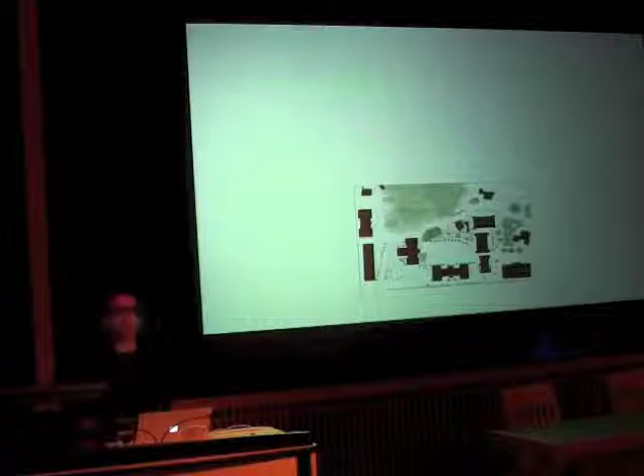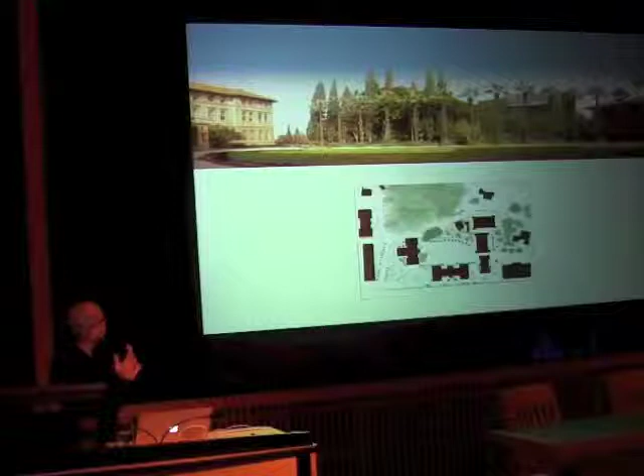So we knew from the beginning of this project that given the site of our project in a kind of embedded bosque of trees, our building was not going to speak to the urbanism and the architecture of the campus, but rather dissolve itself into the branches of this nature. Our task then was to develop a system that could generate an organizational structure, a spatial structure, and a way to blend the relationship between the inside and the outside of the building.

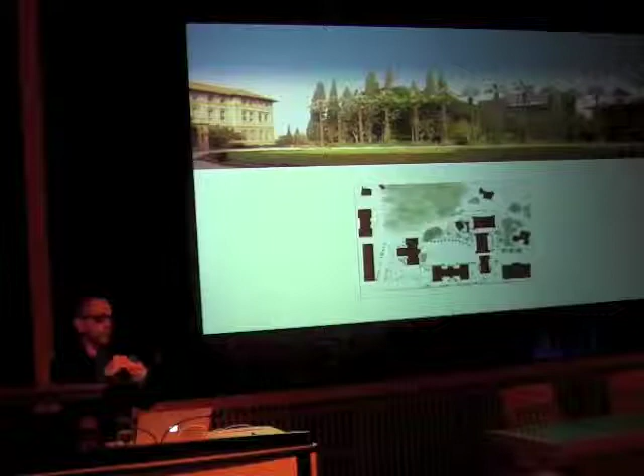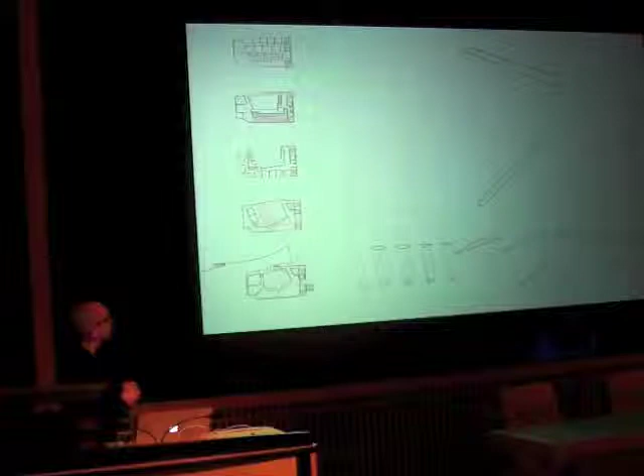To do that, we started with a DNA. A geometry of a hexagon, once truncated, can become triangulated to make a column. Once expanded, it can produce the conditions for a pilotis. Once rotated, it can transfer loads from one condition to the other, or be flattened simply into a wall system.

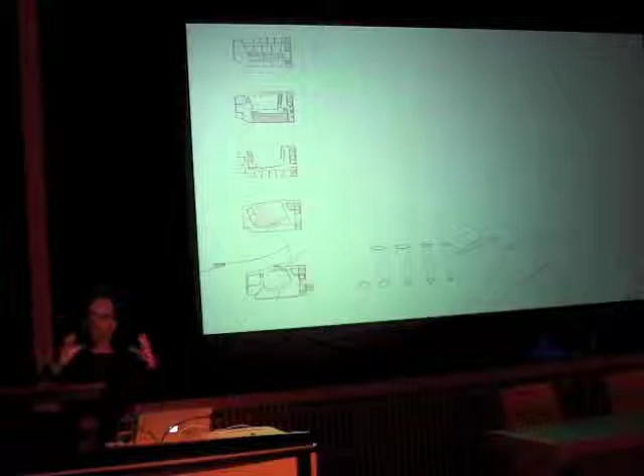The notion that a geometric seed, which is different than a concrete block per se, becomes in a way a constellation of forces that can essentially be compacted and thick at the bottom, spatializing itself, transfer loads in the middle, and effectively lighten up at the top and develop a system of branches that holds up some of the lighter aspects of the building.

Following the modern paradigm, one can begin essentially with a simple tray-based structure for large volumes like auditoria, create transfer beams for cantilevers, essentially the same thing in relationship to the bosque of trees. And then the configuration of the structure begins to stretch and split in a binary way as it goes to the top. The building essentially becomes an index for the transformation of the structural system.

Here, effectively a courtyard at the top of the building, describing the spatial mesh in which the building is embedded. And of course, on the outside of the building, the idea that structure and skin envelope becomes part of its iconographic agenda. That structure here has now become part and parcel of the redefinition of the type.

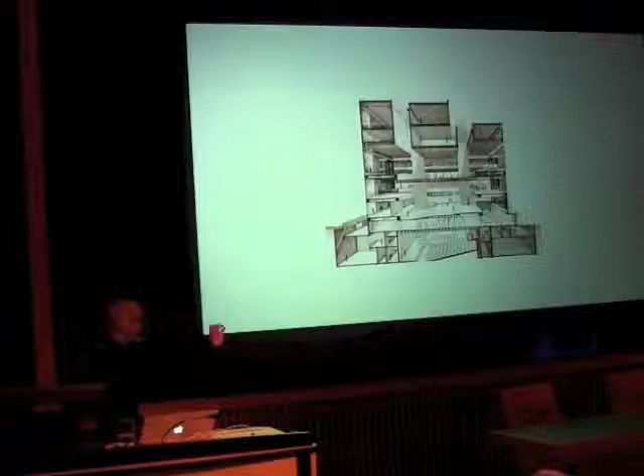And that building somehow manifests in different tiers: the auditorium, the exhibit space, the library, the crit space, and the studios, bringing the light from above, where all of this is brought together. And the quest somehow for integration and synthesis is consistently at work within the body of our work.

At Georgia Tech, we inherited a building, the Hinman building, and it is an extraordinary piece of architecture. Designed by Heffernan over half a century ago, the building has certain salient qualities that make this maybe not just a project of restoration and preservation, because we couldn't fit all of the program within it, but it makes it a dance with the existing building.

I will show you that in a second. But first, urbanistically, the recognition also that the School of Architecture at Georgia Tech is 3 or 4 different buildings, and various functions are distributed between them.

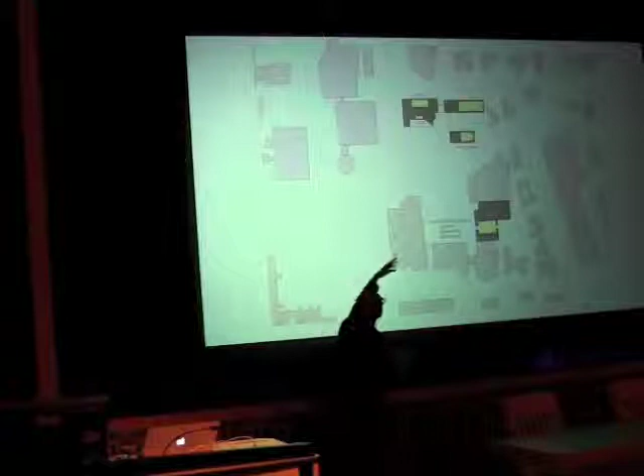This is simply the new wing that is going to help to connect the main quad to a working quad in the back, using the high bay of the existing building as a massive factory, a studio space, that brings all of the elements of this campus together, making the quad and this interior part of a public continuum.

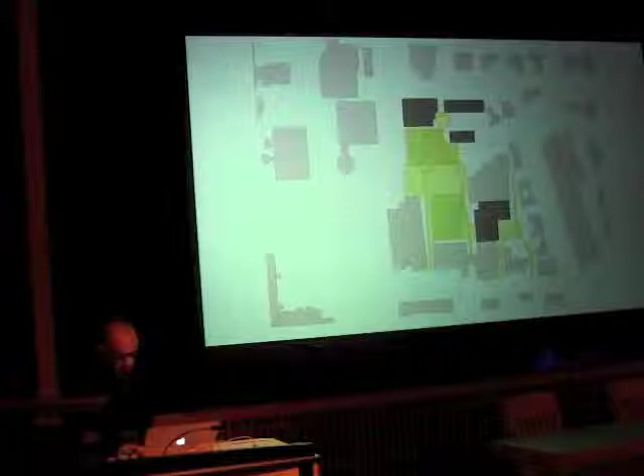Now, as I was saying earlier on, the studio, as you well know, is at the heart and the soul of the School of Architecture. It is composed of elements that need to work with it. The idea of the basic support that one needs, printers and a shop. The notion that the studio space is not merely a place of production, but is a place of research, where libraries and laboratories may get integrated into it, in the studio of the future, where culture becomes part of it.

What happens when you don't segregate lecture halls from the studio space? What happens when you lecture in the studio space itself? And the space that starts after hours, where cafes, movies, and other things happen when the faculty are gone. This is the conception that we had in treating the high bay at Georgia Tech.

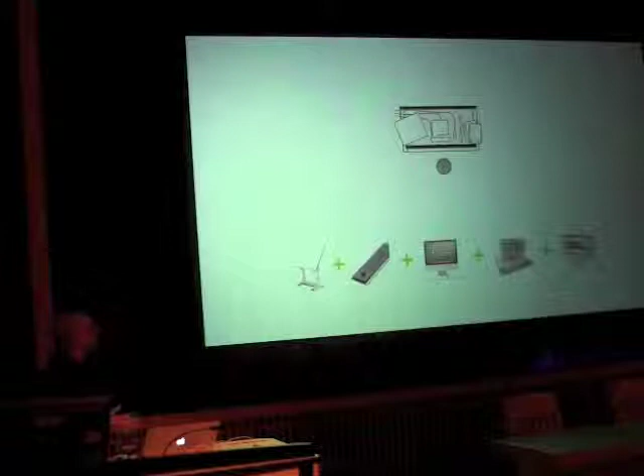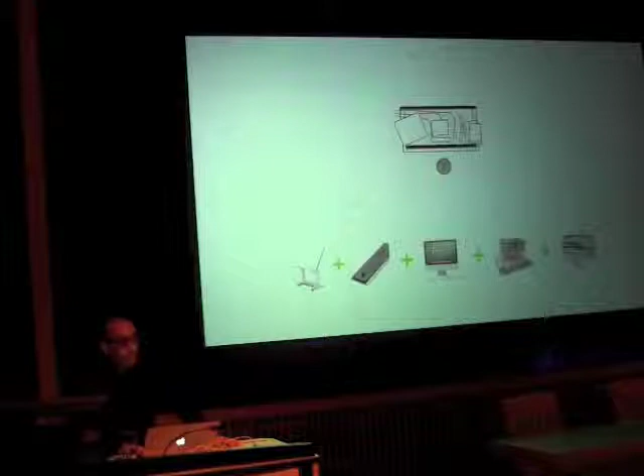It was with the acknowledgement that the parallel rule no longer exists, and the way that we work and the way that we store is just different. So we needed a new way of conceptualizing flexibility while accommodating for the differences of pedagogy in one space.

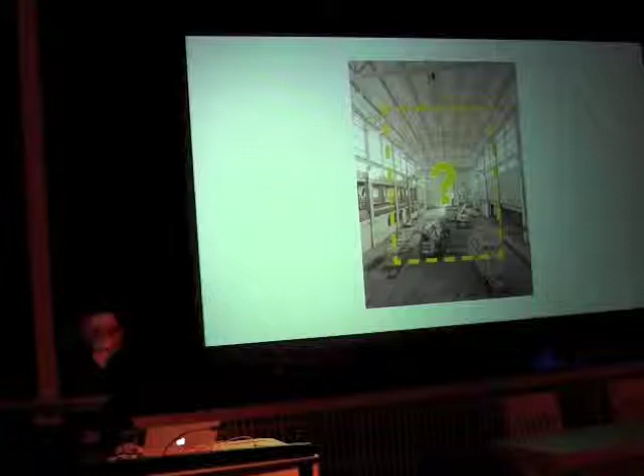The big question, what are we going to do in this incredible space that was given to us? A huge factory space where amazing research on helicopters and many other technologies were developed through the 20th century. And you know, it reminded us of the Tate, where extraordinarily different exhibitions were able to manipulate that space as a public space, as a piece of urbanism, as a space of phenomena, and that our space too could become such a significant anchor for the campus.

But being also submitted to a formidable amount of programming, we realized that we actually have to occupy it. So after a massive struggle with the university, we realized that we had this high bay, and now we have to just stuff it like a piece of taxidermy. Luckily, the economic gloom and doom happened at that moment, and the budget was cut. And so the value engineering process helped us to reduce the program, yet not kill the building.

And so in fact, within this process, we realized that the high bay can remain intact, but now we have to think of it strategically in terms of what it can do for us. We realized right then and there that what was important about the ground was its flexibility. Yes, we could lift the ground up to wire it and put all of the technologies on it, but there was a great asset in the truss and the crane that was on the roof, because that's where everything could hang from.

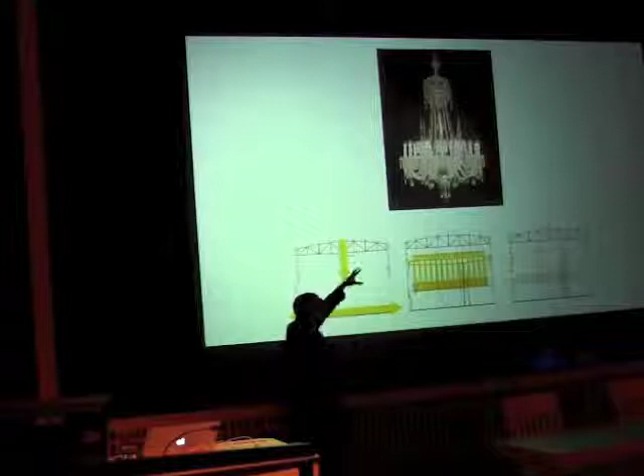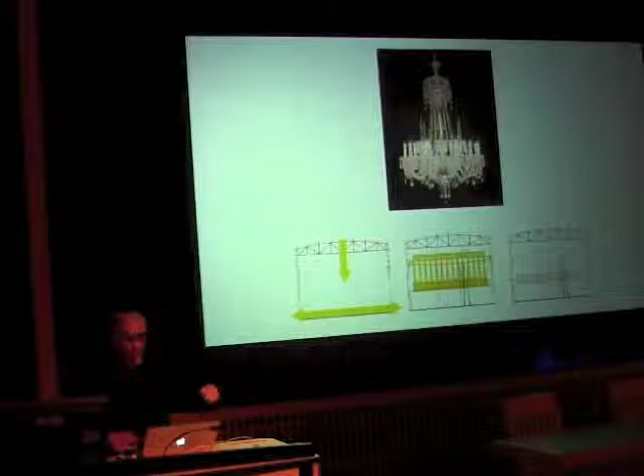And so the project was really born out of this tension of flexibility defined on the vertical axis versus the curricular flexibility connecting the studio spaces with exhibit spaces, fab labs, PhD spaces, and so forth, connecting it socially on the horizontal. And really, the building was in a way born out of the repurposing of that existing crane, locking it into space and literally suspending the new visiting critic studio on top of it, where this tray is suspended in midair.

The ground is flexible. It has desks, but they can be moved, they're on wheels, and they constantly get reshifted in many configurations. The roof is the piece of infrastructure that informs the space. The crib, what we call it, is really the suspended element with one stair that kind of comes down only at one point, lands on a desk actually, it doesn't even touch the ground.

And then on the southern wing, a new spiral stair that connects and activates the southern edge of the building, creating a kind of continuous circulation loop. And finally, the lighting that hangs low during the workspace hours, but when you're making large installations of 30, 40 feet tall, is brought up to make the high bay an actually functional space once again.

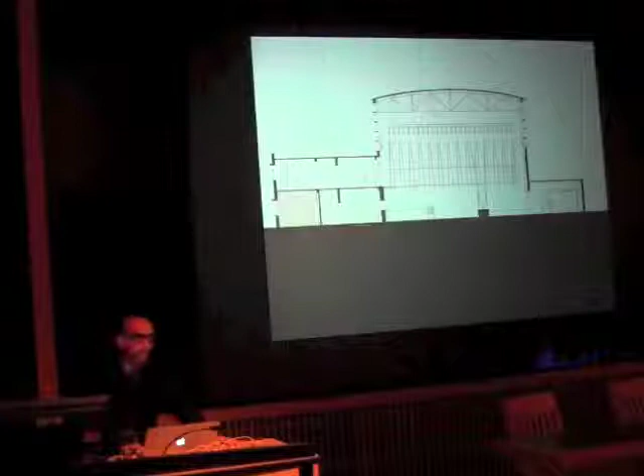And then here, the lateral flexibility that is given in connecting the factory to the fab labs, the exhibit rooms, the PhD research spaces, and the other studio spaces makes this a kind of interdisciplinary space where everything comes together. I apologize, I don't have the images of how this is being used, but in fact, the Beaux-Arts Ball has occurred there, the exhibitions have happened there, crits happen there, cinema happens there, graduation happens there.

So I suspect that your own high bay has had many events like that. But keeping true to the idea of suspension, everything is also suspended within that space. The guillotine wall that you see in the distance there is a 60-foot wall that separates the gallery from the main space and just drops down. The spiral stair is an off-the-shelf element that is shrink-wrapped with a kind of extend mesh fabric, as a kind of tensile structure that is suspended from one of the chords of the truss.

The grid, as you see there, unfolds the steel flanges of the structure to produce a stair that lands on a collective table. And of course, the assembly of all of these pieces in relationship to custom fluorescent lighting that we drop in place that get plucked up when needed. And it's amazing actually as a building because it's truly rough. It's a rough piece of industrial architecture, though it was really pleasurable to see huge thugs weaving this thing very delicately and crafting it like really a beautiful piece of architectural work.

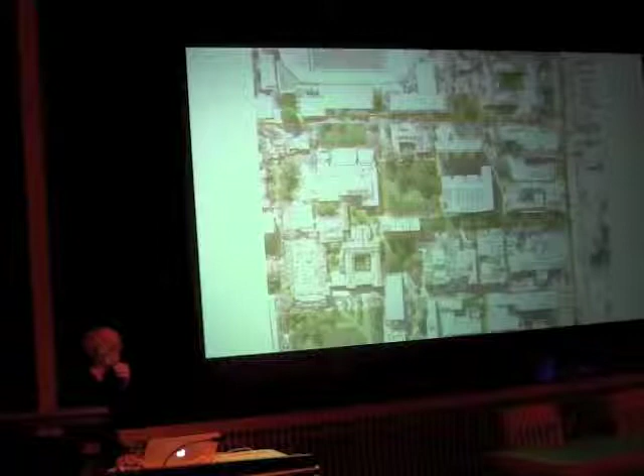There are many issues about this project, but suffice it to say that this is a building right in the center of what is called the concrete lawn right above me here, that is in the round. There is no front and there is no back. But part of the critical agenda of this building was to make it urbanistically integrated into the rest of the campus, drawing in the disciplines from all over the campus into it, and actually exposing the functions of architecture, educating people about architecture, but also giving up our programs to their use.

One of the agendas was to bring Masson Road on the south from Swanston, the main artery into the campus, and connect it back into the building. To produce a new court on the west to what they call the Lizzie Murdoch building. This is the famous Murdoch, the mother of the famous Murdoch, and puncture it through the building, producing a new promenade through the building. A connection between the main central space of the building back into the northwest edge, a cafe and an alleyway that connects it back to Swanston.

The service area to the northwest, a kind of Fab Lab court to the north, and of course the concrete lawn, the main public space that connects the building to the student center opposing it on the other side, at the core, at the heart of the campus. The School of Architecture and Planning and Landscape and Building Construction is what defines the heart of Melbourne Uni.

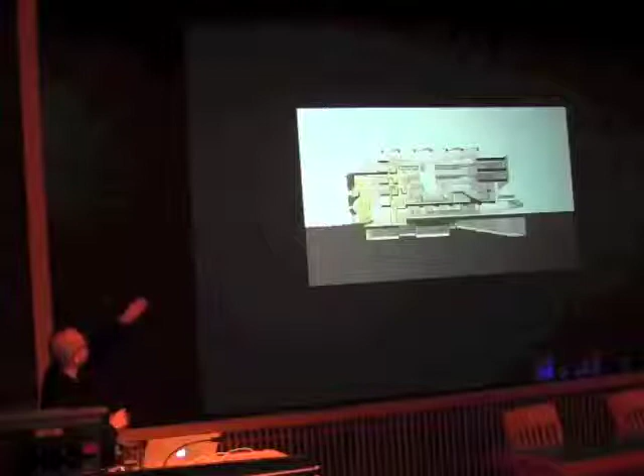A place in section with a piano nobile, a new ground plane that is above the ground, engages an existing building, the Joseph Reed facade, the new circulation, a vitrine against the Lizzie Murdoch building, and then finally a ceiling, a kind of coffering of light from which, very much like Georgia Tech, is suspended the visiting critic studio, a kind of iconic element that brings together some of the key elements of this project.

The building of this new ground was essential to it, because essentially what we wanted to create was a street that runs through the building, accessible 24/7, and exposing the unique functions of a school of architecture to the rest of the campus. The spaces of research on the left, the library, the exhibition hall, the Fab Labs, the cafe, all of those things that basically bring architectural culture to the fore.

And then this piano nobile that produces this new ground. This new ground is that internal plaza, the ground for this atrium, above which the visiting critic studio is suspended. The ground essentially informs a kind of unit, a unit that grows up to become the locker systems, where all of those students who don't have a dedicated desk have places to store their material.

This locker system becomes the envelope, a spatial system for a classroom underneath, an experimental classroom, but also a bleacher system, an outdoor classroom open to the atrium, which anchors one corner of this space. The circulatory system that envelops this, in fact, is not a corridor. It's a widened system which is then occupied with permanent pieces of furniture that begin to define programmatic possibilities that would otherwise be succumbing to simply circulation space.

This ceiling is a structural ceiling. It is all made out of laminated glue-bound beams, bringing in southern light. Southern light for them is northern light for us, from which is suspended the visiting critic's studio. The idea of this was to transform the monolithic, thick, and structural system of this coffered ceiling into a form of suspension.

That form of suspension essentially takes the thick wood and begins to create a veneer system out of it as it goes down. What is deep and monolithic yields to a thin veneer system as it hangs down to the bottom. Essentially a glulam system that transforms itself into a thin plywood system, the perimeter of which extends the kind of millwork logic of the space.

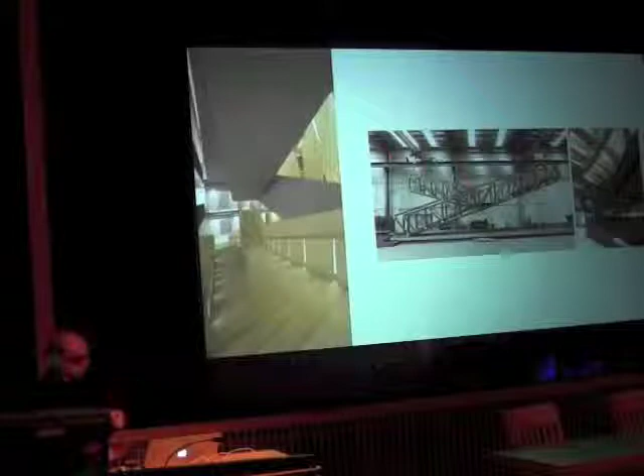The connection of the coffering at the top defines the depth and the thickness of that entire system as it comes together and begins to produce a form of entasis, a buckling of that roof literally at the center as it hangs down. Flanking this is what we call the Y-stair, a kind of continuous loop of circulation that constantly splits into two so it activates both wings of the atrium. Here you see the construction of that Y-stair literally hot off the press just last night.

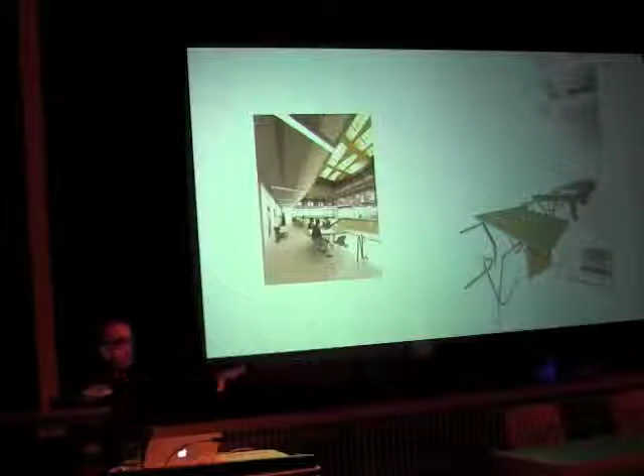And then a stacked series of terraces which then acquire a variable depth to them, where different programs are amassed to produce the life and essentially the body of what I call the studio space of this building. This is all the borrowed space along these flanges of this perimeter. The ground, of course, is the public plaza. The second deck is conference tables, collaboration spaces that look out over onto that plaza.

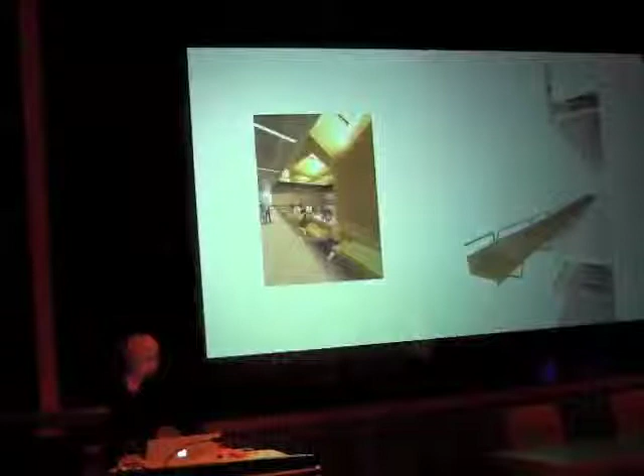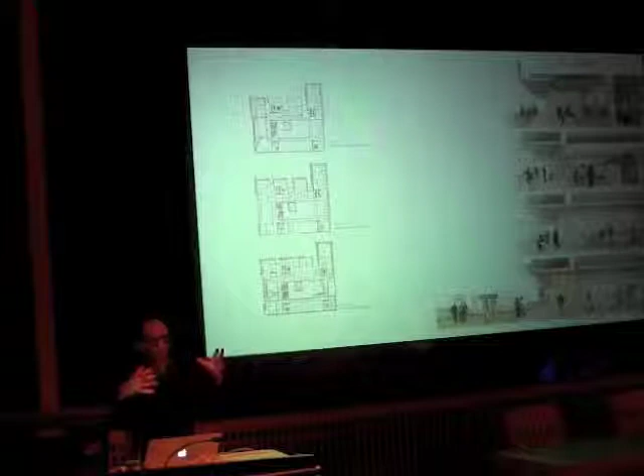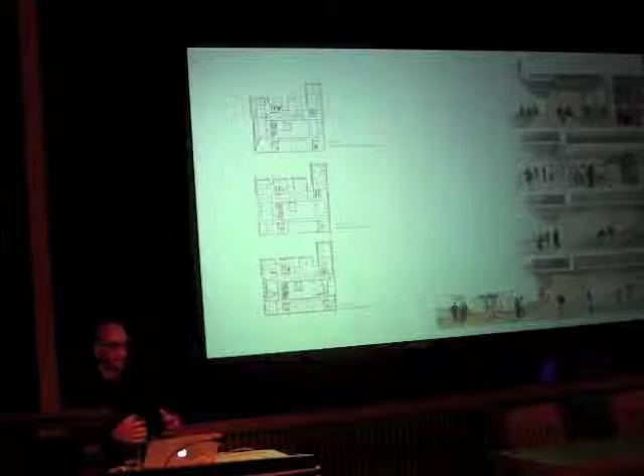The next space, counter spaces that extend the spaces of the studio and classrooms with seats that look back onto it. And then on the top, next to the PhD spaces, benches that look back onto crit spaces that extend the logic of these spaces into the depth of the building. And thus, each of these spaces produce a kind of a zone of pedagogy that keeps recalibrating the depth of this building, taking what would be a classic donut organization and testing its frayed edges to become appropriatable by the student body. In a way, transforming spaces of scheduled dedication into spaces of appropriation.

Now, having just seen the completion of the Media Lab at MIT, a beautiful and arguably sophisticated building, but unfortunately a perfect jewel, we were also very conscious of the necessary roughness of what an architecture school needs to be. We see the School of Architecture as a piece of infrastructure that the students transform. It should precisely not be too finished.

So we wanted to produce a structural shell of concrete, and the precast industry of Australia is fantastic. But also working with a ply system of wood, produce formwork that becomes embedded in the existing building and stays there as part of the natural resource of the building. So in fact, this is a wood building that is built up 5 stories with the formwork that becomes permanently embedded in the building.

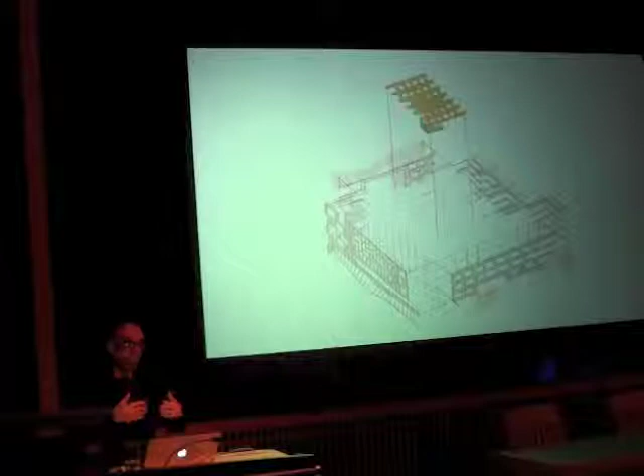And then the skin of the building becomes a variable louvered system that engages with the northern, eastern, and western light in different calibrated ways as it navigates itself around the building, with the southern exposure exposing the raw concrete of that structure.

Ironically, we had to inherit not a building, but a facade, the Joseph Reed facade, from 50 years ago on the site. This building was never on the site. It was a bank in downtown Melbourne and was transported here because of some kind of donation to preserve it, and never had a building behind it that corresponded to its syntax, its organization.

This also became an opportunity for the first time in history to frame the importance of this structure. It is actually a very beautiful piece of classicism, but also establish porosities between the inside and the outside and a meaningful engagement with that facade. So in fact, one of the things that we were able to do is to develop a line of thinking for it. One, a way of framing it, documenting it, understanding its depth.

Two, developing a structural system that would buttress it to keep it in place. Cladding it from the inside, registering its apertures, its openings, its windows. But then for the first time, engaging it, penetrating those windows, and targeting views out into the plaza, but also extending two of those windows as a kind of studio crit space that engages back into the circulation system and erecting it from that facade.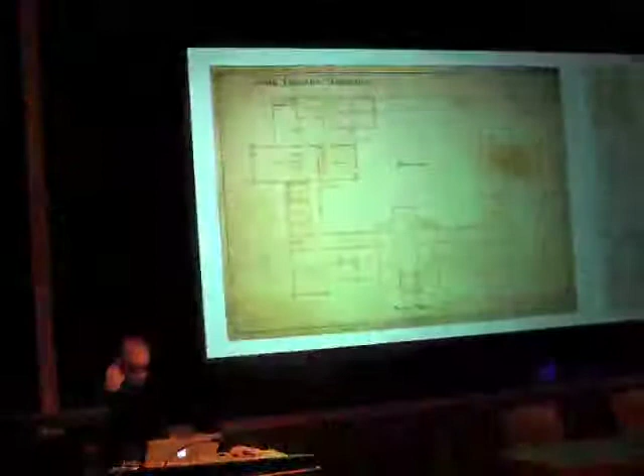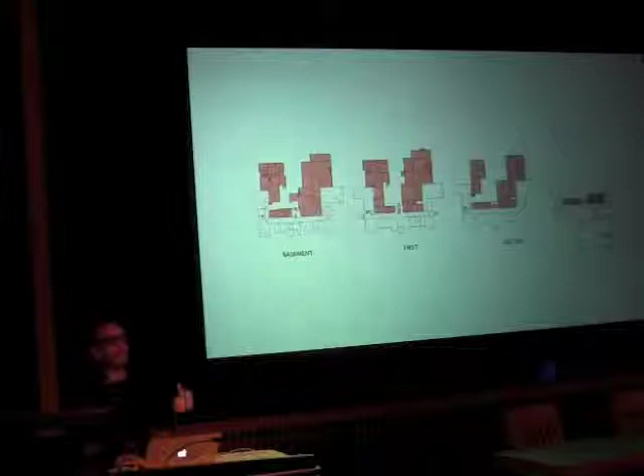And therefore this project, all of a sudden, for the Daniels School of Architecture, Planning and Landscape, becomes this incredible opportunity to reflect on the design disciplines as an organic and larger conception. It's not just a building of architecture, but really a building of landscape. The existing building has an interesting existing morphology, a kind of U-shaped building, but over a long period has a series of aggregations of additions that have been added onto the northern side. This is a monumental building that on Spadina has this incredible presence on the south facade, but a kind of village-like series of structures on the north.

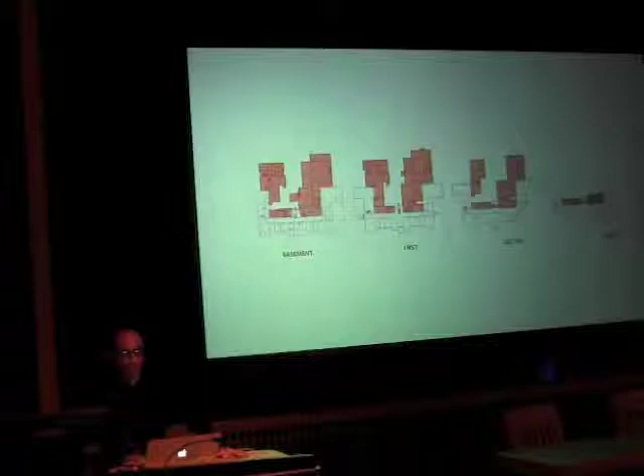So part of our strategy was really to readapt, if you like, misadapt the building, using the existing circulatory system that ends in two pavilions, invading it, if you like, but completing what will be a new court for it. Completing the building then enables it to get a new facade on the north, for the first time gaining a kind of presence towards Spadina North, anchoring the building with cores on the two upper sides.

In doing so, producing a new flexible hall that is at the core of the building, another courtyard, a space that's divisible by three for three classrooms, a multiplex auditorium, a kind of space where everything happens, and bringing this all together in a way that negotiates its relationship between the square at the center of this circle and the geometry of the roundabout as a huge urban phenomenon.

Now, what's important is that Toronto is a series of north-south axes with a few unique urban spaces, circular in nature, and this is one of those spectacular spaces. It's a space not just of the campus, but of the city. The existing building looms large and is visible all the way from the lake, but in fact has never had a northern presence. So our strategy in great part has to do with creating a base, a socle for that, producing a series of landscapes around it that can give additions in the future, and making the landscape a kind of buffer for the new building, and then using that to illuminate those spaces within that landscape and create a new condition for the urban perimeter of this project as a whole. In essence, completing the circle, urbanizing the circle, and giving it new life.

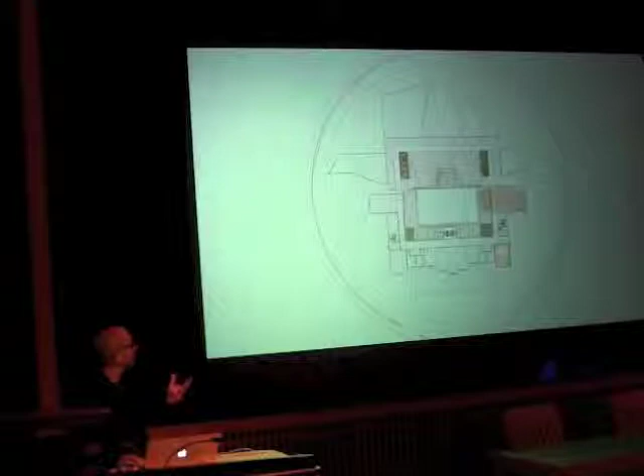Of course, the building comes with certain constraints. A water easement that does not permit us to occupy the east side, but it becomes a way of developing a logic for its flexibility and its expansion, with the possibility of an expansion into a gallery in the first phase, the expansion of a smaller lab, a kind of urban institute, a research institute, all of which work off of the logic of the existing corner anchors that are part of a kind of latent logic of the building.

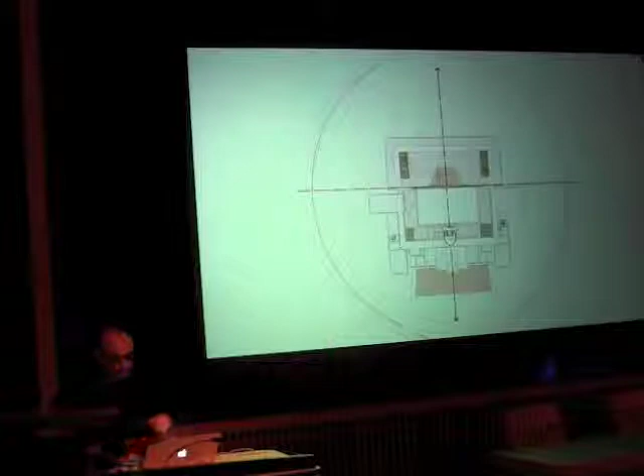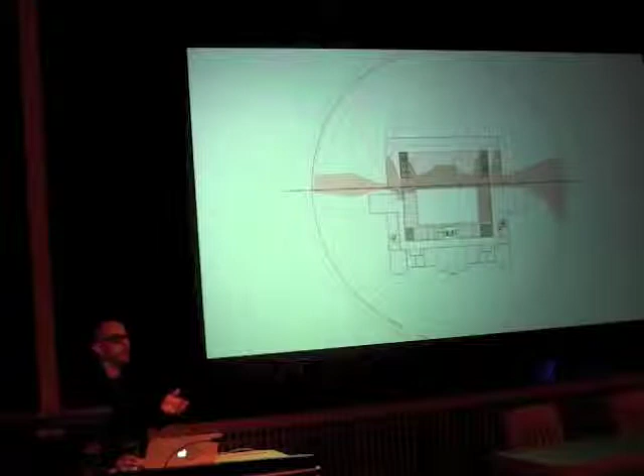All of this recognizing that the strength of this project is known on the north and south axis, an important moment of acknowledgement in the building, and something that really is reinforced by the stature and the presence of the building, but without ever a program to that south. So with the addition of a new terrace, in the cold climate of Toronto, the idea of a new public space that leaks out of the building towards Spadina south, this was also a moment to recognize that the practical functioning of the building doesn't happen on the north-south axis, but the east-west. The campus is on one side, the community is on the other side, and the street that runs through this building is really what gives life to it.

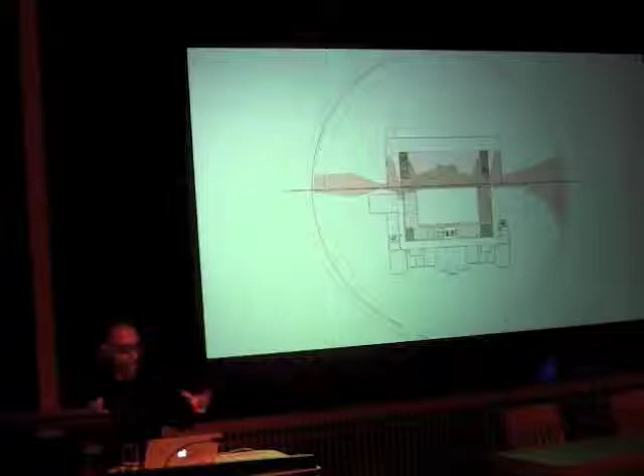And all of the key programs of the shop, the auditorium, the cafe, and all of this business happens right off of the street. Again, 24/7 it remains open. So with the new facade on the north, as one navigates around this new crystalline landscape on the perimeter of the building, we are drawn into the west face of this building with this new silhouette that it gains.

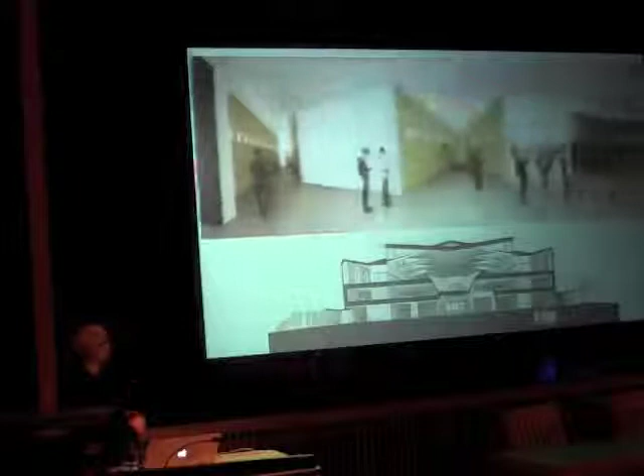On the eastern side, we in fact open up a new public space, a bleachered seating facing south, the characteristic oak tree, which is part of the symbol of U of T Toronto, and the gallery space that literally opens up onto the eastern face. The street then is lined with lockers and with a series of forced perspectives, the most prominent of which is the view up Spadina North, bringing natural light into the core of this building. This large vitrine on the left then brings in light even into the auditorium.

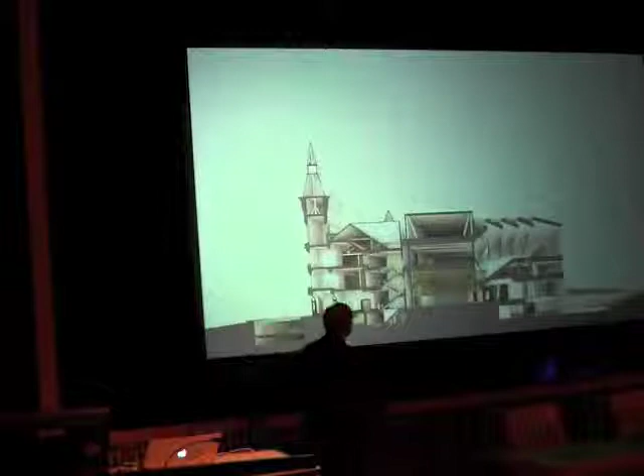What is at the core of this building has an optical advantage to the spaces beyond, but also in section produces the possibility of drawing in light not only through the Fab Lab into the auditorium, but also from the skylights above here, and a series of straddle spaces that create out of that core a kind of luminous box on the interior. In fact, what would be in another project the black box, the pit of this project, has all of the main programs straddled around it in this saddlebag fashion.

The undergraduate lounge, key crit spaces, a social space of bleachers and crit space, and all of the studios going around it. This auditorium would then be opened up on all sides into a theater of performance, if you like. With blackout screens, of course, but then usually quite open so that the activities of what's going on in there are always visible. When lectures get filled with the star lectures, they actually leak out into these very spaces and have a social and performative connectivity between one side and the other.

Connecting then from the studio spaces above, the light is also able to, of course, penetrate these civic openings, connecting what is like a bleachered space with a large flat space. This space is then divisible into many types of spaces: 3 classrooms, symposia that are centralized, multi-directional spaces. Essentially, what was a program that was for 500 people is now being expanded to 1,500 people, incorporating a much larger undergraduate experience.

Again, like many other programs, the issue of security is always a question. So while all of these are strategies for publicizing the building, the actual entry to the upper studios is a controlled moment off the street. As one ascends, one engages in a promenade that is part of that civic space that eventually ends onto the northern face, reconnecting to Spadina North with, of course, the face of Spadina, this northern wall, a kind of beacon, gaining all of the solar conditions of indirect light from the north.

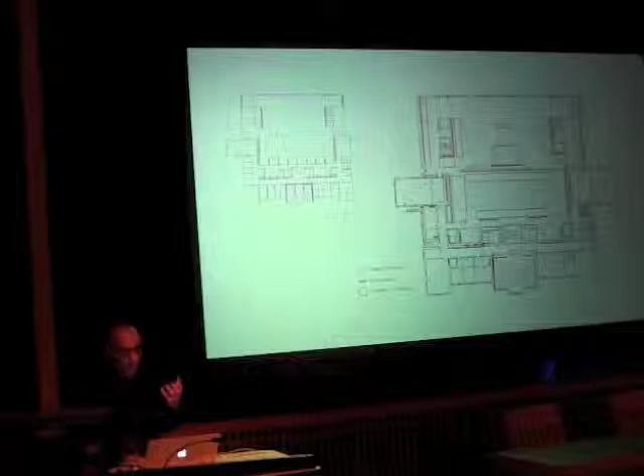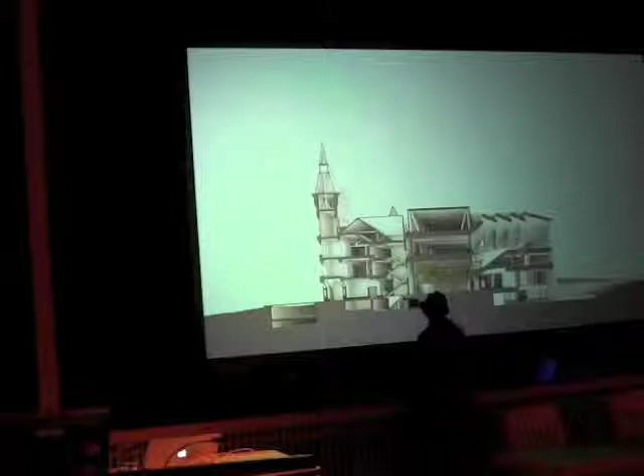The way in which this project then is conceived is really about how one integrates the old and the new together around this core in the center. And all of this culminates in this spanning moment where all of a sudden the structure stops at the 2nd floor. At the 3rd floor, a further structural cantilever spans off of 2 cores and then suspends essentially an oculus on the center. This produces a new tabula rasa that opens the space up for many different types of pedagogy.

And part of the strategy here is to bring together in a building, like all of our buildings, I won't go too deeply into this, but every building obviously right now has to deal with issues of ecology and sustainability with a higher purpose. And in buildings where you have a captive audience of students, faculty, and critics, which are much more knowledgeable than you are about a certain topic, the pedagogical and didactic mission of these buildings becomes all the more purposeful. So this was an opportunity really to embed within a structural system a daylighting strategy and a hydrological strategy where all of the surfaces are purposeful.

So this animation brings together the relationship between the performance of the building and the building as a piece of identity. The embedding of the northern wing into the south, the greening of the roof as a way of mitigating the water drainage, the drawing in of light from the north and a little bit from the south, the repurposing of the court, the extension of the landscape into the adjoining urbanism,

minimizing the use of electrical usage at nighttime. Minimizing the need for cars. In fact, the majority of the space is accessible by bike and pedestrians and the public transportation system.

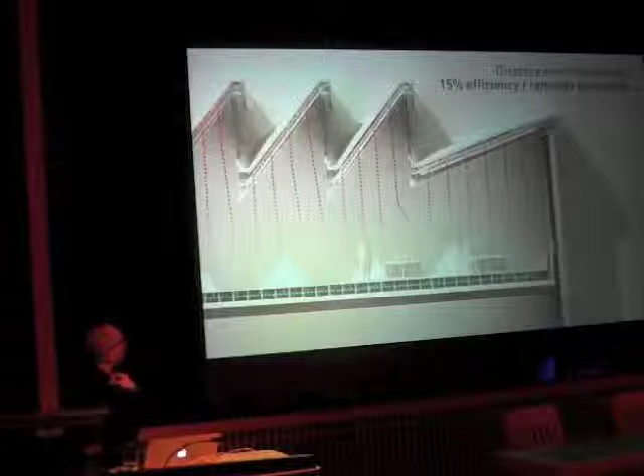And then most importantly, what I was saying before, the idea that we minimize the exposed envelope using a natural ventilation system as well as displacement ventilation through a raised floor system in the ground. The minimization of electrical usage through the lighting. The harvesting of stormwater drainage for the irrigation of the landscape on the outside.

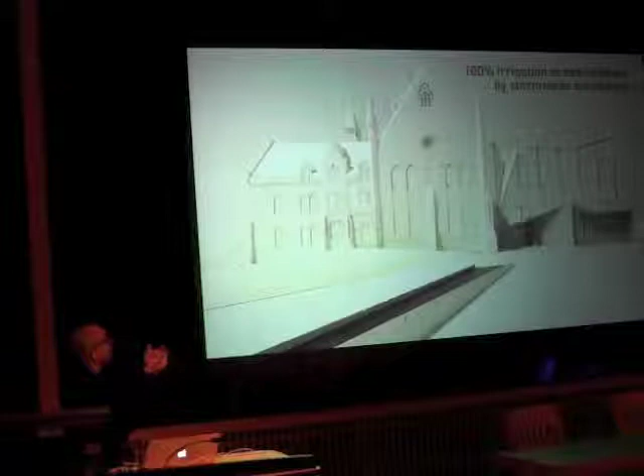And then beginning to see that the silhouette of the building, the facade of the building is literally a register of that harvesting through the development of a new reveal within the facade system that drains all of that water system down, brings it into the main public space, contains it within the system, and then redistributes that into the landscape.

If you like, this is a building that is robust typologically in its autonomy, but at the same time, it is a piece of landscape architecture. And in many ways, that is what we were faced with in dealing with a new building in southern France. We had the opportunity to advance a dialogue with two great villas from the 1970s or 80s of my professors.

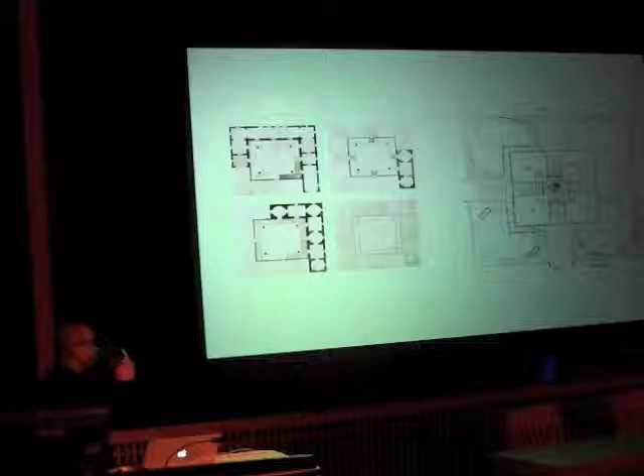One which is composed of biaxial symmetry on the right-hand side, but whose main orientation works off of the oblique. And the other one on the left, by Silvetti, is a project that is centrifugal. In fact, its center is there to anchor only a centrifugal action of ascending stairs on the edge.

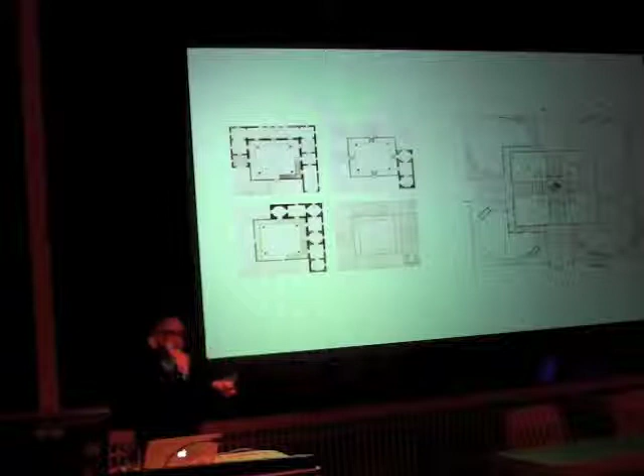We had the possibility of developing a courtyard building which is on the side of a hill. The displacement of the volume in relationship to that landscape produces the possibility of connecting the house to itself on two diagonals with these stairs at the corners, while the entry and the family room, these are two different floors superimposed on each other on the opposite obliques.

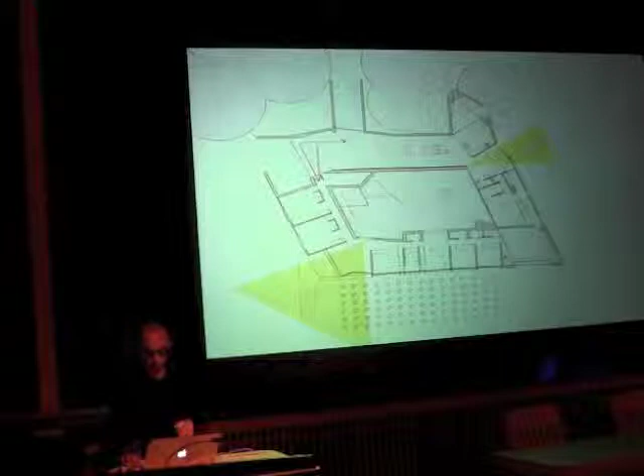The terracing function of this structure produces a scenario whereby the main living areas are engaged with a courtyard and a pool on one level, but with the majority of the bedrooms underneath looking back into that pool.

The nesting of these two volumes brings together the logic of a building whose geometry is a parallelogram with essentially the living spaces and kitchen up in the upper bar and the master suite in the lateral bar, a swimming pool wedged in between. And then below, a series of bedrooms which are then disassociated from the bathroom facilities, effectively making 7 rooms occupiable by 22 people that then use these bathrooms in a kind of dormitory fashion.

The circumstances of this project are fantastic, with families coming from the US, from Europe, and the Middle East, all converging on this vacation home together at a critical moment during the summer where the family can get to reconstitute itself.

Now, the entry of this building then is quite closed. You are barring the view precisely because at the moment of that threshold, for the first time, you get to see the splendor of the Mediterranean as it opens itself up in the horizon in relationship to you. The organization of this modern extrusion, if you like, is all about the construction of that horizon. But for the client, we developed the idea that that is not your only commodity.

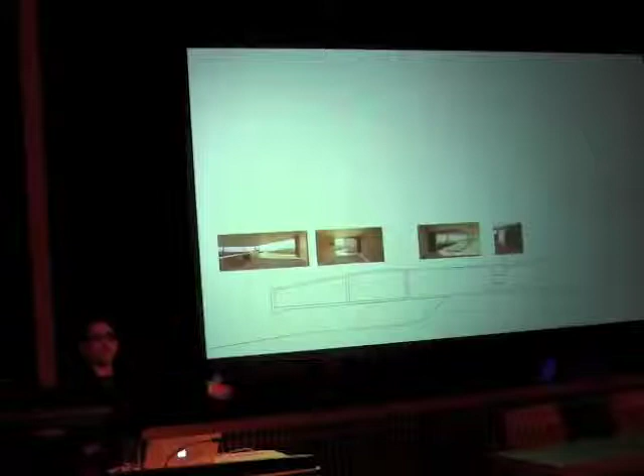There's more to this. If you begin to reconceptualize the space, towards the west, there are beautiful spaces of evergreen pines. And if you begin to think of the roof as a structural system that vaults not the short direction, but the long direction of the building, you begin to incorporate the landscape in a direction where you thought there was no value. And thus the building, in many ways, is about the relationship between the construction of a panorama on one side and distinct and valuable frames of views on the opposing side.

The crust, the shell of this roofscape is really about a kind of dedication to the natural heritage on the western portion of the site and an engagement, an extension of that landscape to the west.

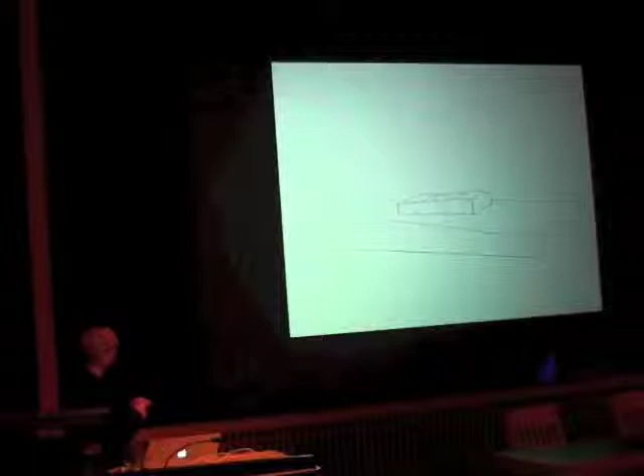The building then comes together as a kind of exercise in typology. Not a square plot, but a kind of trapezoidal plot produces distortions in the plan that radicalize the panorama on one side, but individuate punched views on the other side. What would have been an internalized building becomes decked in two levels, acknowledging that landscape as it dips down and looks over another wing.

A new landscape is constructed on the roof of the building, not only for the hydrological systems, but the framing of views. And then most extraordinarily, the lapping of these two wings produces a new landscape that literally is embedded and extends the groundscape of one side of the building up into the internal courtyard. So even though the front door is formalized in the upper wing, there's a kind of natural loop that runs through the building and into the landscape below.

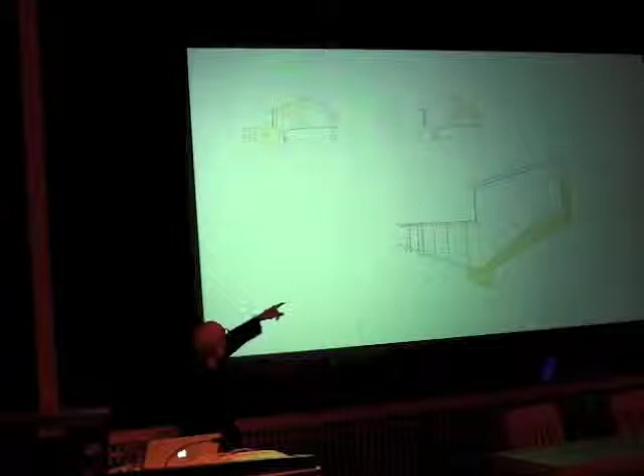What is beautiful about the building is that being in southern France, there are vineyards, there are fig trees, there are citrus trees. It is really a beautiful landscape to be beholden. Now, what you see here as a front facade effectively is a massive concrete beam that is cantilevered, suspended by one stair on the deep end, and essentially an anchor point on the other end. It's one beam penetrated and connected to the retaining wall of the swimming pool that holds it aloft.

And so the wall that you see on the right-hand side of the swimming pool is coming up at a lower level, penetrating the master bedroom, and effectively holding up that wing as not just a structural exercise, but a moment in which, as I say, the structure catalyzes this type to become something completely different in the context of, not type, but a piece of landscape.

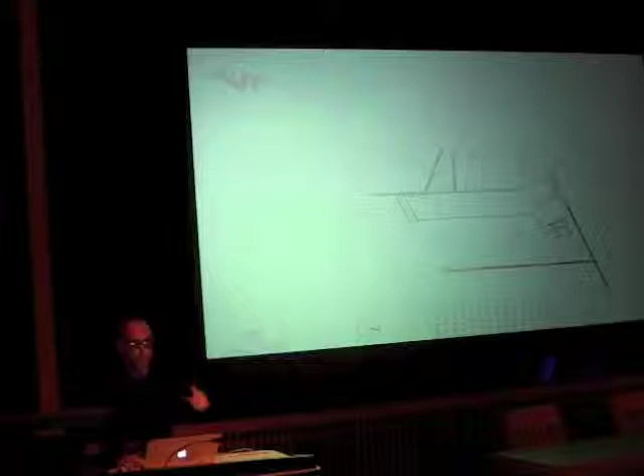Now this wall is then further elaborated with a kind of corridor space that begins to programmatically expand the relationship between the inside and the outside, taking the outside landscape into the bedrooms and then into the depth of the corridors, and then taking the program of these bedrooms, essentially the tile, the terracotta from one side and the bathroom tile on the other side, we begin to populate the corridors with these two competing iconographies, where on one side the bedrooms invade the corridor, on the other side the tile of the swimming pool leaks into the bathrooms and then subsequently into the corridors themselves. Here from the shower, the sink, a mirror, and then the view into the swimming pool.

Now, a slight detour. As you know, we're interested in the advent of construction. And this is the first building that we've done in concrete, and it's a radical departure from the studies of aggregation that we've done over the last 20 years. In other words, what happens when you can't build anymore with modules? And now with the advent of digital fabrication, you can essentially build anything you want, which escapes the tyranny of the relationship of the human body to a unit of construction that you have to put in place.

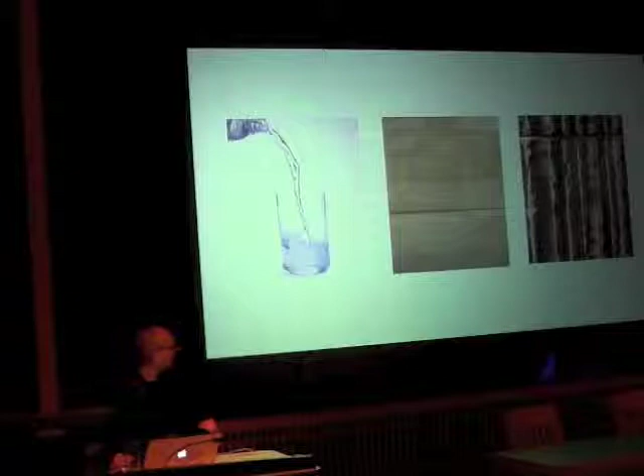But in the context of this building, it really is about how you begin to index a medium that is initially liquid, that then becomes indexed in a solid and massive piece. Recognizing that concrete is the result more of the formwork at work than in the aggregation of aggregates at any given time. So on the left side, you see the slats of wood as they become indexed on one side. In the right-hand side with Rudolph, the kind of post-production of bush hammering.

And so, as an exercise, we did two very different types of studies that this house could encounter with, probably at the same time. One being digital on one side, the idea that the mechanism for representation and expression is completely divorced from the way it's fabricated. We can make a formwork that can make it look like anything we want to, and on the other hand, working literally with the aggregate content of that wall to begin to develop its expression.

So first, the notion that out of the silence of a poured wall, one can develop different digital formworks that you can readjust, showing the way in which a smooth wall can become rusticated as you begin to go into the depths of the entrance area. And this displays essentially the absolute arbitrary relationship between the signifier and the signified. You can make it anything you want.

The other one is more difficult and probably much more expensive, but is worth the kind of speculation. The notion that the smooth walls of the interior become engaged in larger chunks of aggregate as they get cast into the retaining walls of the landscape and effectively become large stone walls as they go off into the landscape and begin to structure the experience of the landscape at large within the property and beyond, a kind of characteristic feature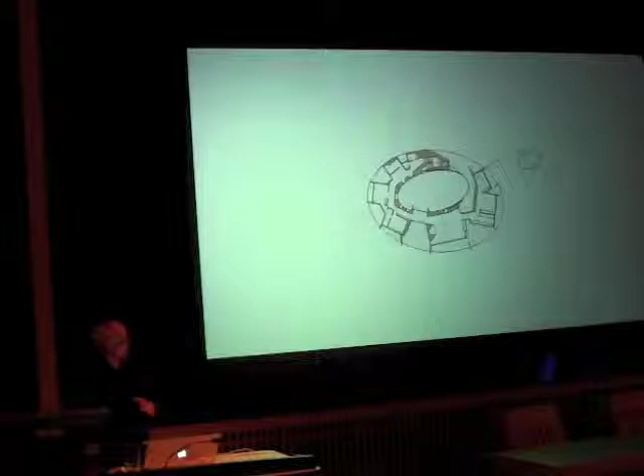And the only way to do that was to torque the plan, essentially, around those things so that each room, in a way, becomes aligned not on axis, but in a kind of ring to engage the very natural phenomena, the natural heritage around it. In doing so, it produces a series of generic boxes with residual spaces in between.

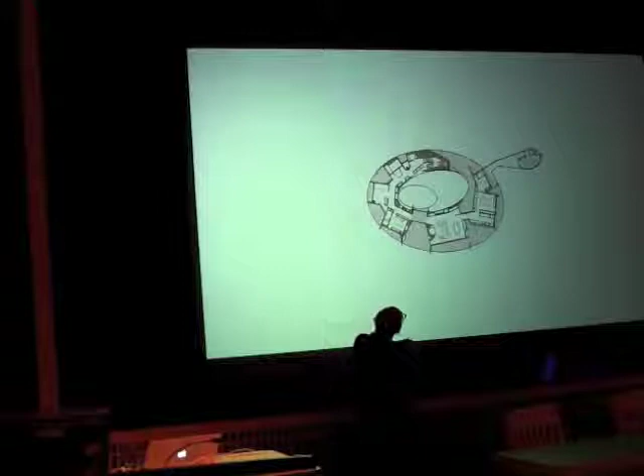Those residual spaces become decks and external rooms for the building, the most prominent of which is the entry space that brings in a kind of deepened threshold that brings you into the most prominent court in the center, as well as a porch that extends through the building. The device of structuring this building is really the generic New England box, and here with the framed view.

Most importantly, this translates to the outside with spaces that penetrate from the kind of wild landscape to the more contained landscape of the courts on the inside, making a kind of indoor-outdoor room. And then the structuring of the landscape in a series of oval spaces that mediate, let's say, the savage nature of the area, which we're trying to maintain with a more domesticated court on the interior.

And admittedly, of course, one gets here by the car and is embedded into the core of the building, underneath it, in fact, into the central court in its center, and then ascends up through two stairs, either a kind of dirty stair or a clean stair.

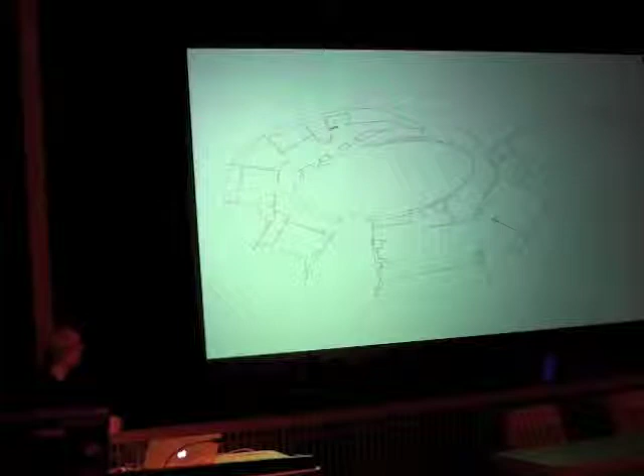But then the argument of the building is embedded really in the plan. The plan is a kind of obsession. The genericness of the box in a kind of constant negotiation through its knuckles, ligaments, and joinery, negotiating the moments of connection. With the inner liner being a kind of circulatory zone, and the outside being the frame that looks out.

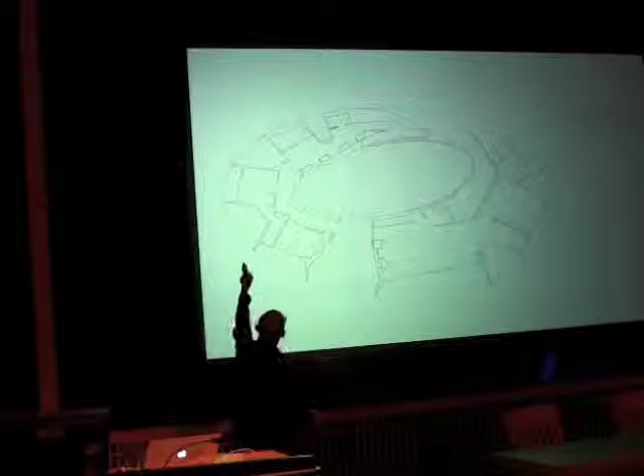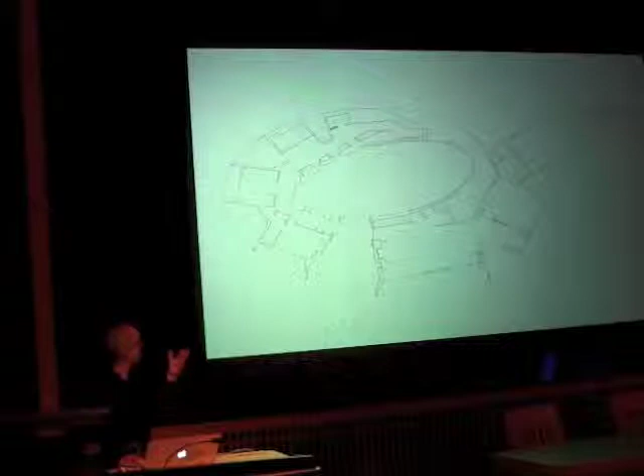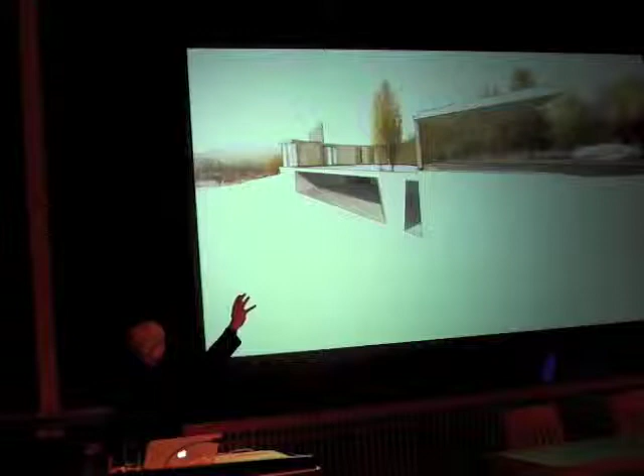The service spaces being the back, one room suite, another room suite, living room suite, and a master suite. On this side, essentially, each of them have a world that looks outside, and then all brought together by the main gate, a threshold that connects the inner court to the driveway and oval court on the eastern side.

Now, importantly, what brings this all together, much like the Saint-Tropez house, is that this vault is constructed through and thought through a staircase system that begins to ascend from the service area and onto the roof. As you go up, the staircase ascends into the crust of the roof, producing the possibility of an open archway that creates the deepened threshold that enters into the building.

The drop-off happens there, and into that core you get the light from the courtyard, but also the deepened threshold of the entryway on the left-hand side. The staircase is then somehow registered into the deck that you see on the right-hand side. A kind of cavernous space, a protected space from what is ostensibly a harsh winter. I keep thinking that a bear could actually live in here very happily.

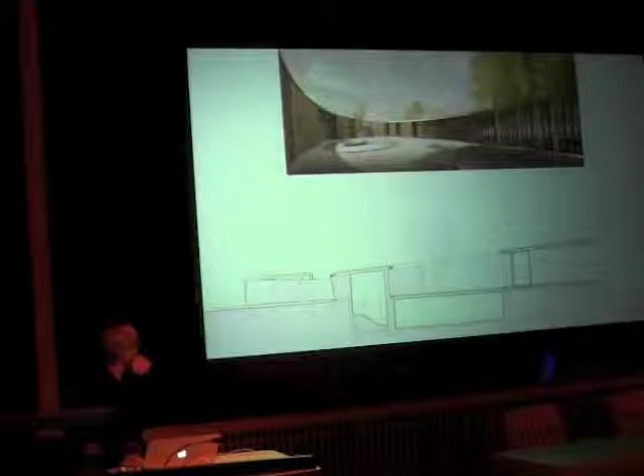And finally, all of this comes together in a kind of central court that is controlled, domesticated, even heated possibly, as the one place of repose from the harsh winds of both the summer and the winter months. And essentially even has a plinth for the trees in the center as it gets anchored, and structures a different kind of experience that is isolated from within the interior.

Now, these volumes are then clad together, going back to the question of tectonics, with a kind of vertical cedar system that wraps each of these volumes, comes back into the courtyard, goes back around, and again, as a ruled surface, wraps around. What is a wall becomes a ceiling, frames the view in that key and most important space, which is an outdoor room.

In fact, in the wintertime, the glazing is drawn here and closes it off. But in the summer, the glazing is drawn back, screens are put in perpendicular, and the inside and the outside are brought together in a kind of complete synthesis and bring together the potentials of this landscape.

Now, at the core of this argument, putting issues of structure aside, has something to do with two pedigrees of architectural planning that I am completely fascinated by. One of them is the legacy that was left behind by Louis Kahn and the way in which different types, even Stirling does this, as you know, in Berlin, where different building types are brought together in collision, if you like, in a collage level, and these junctions produce unexpected perspectival and promenadal conditions.

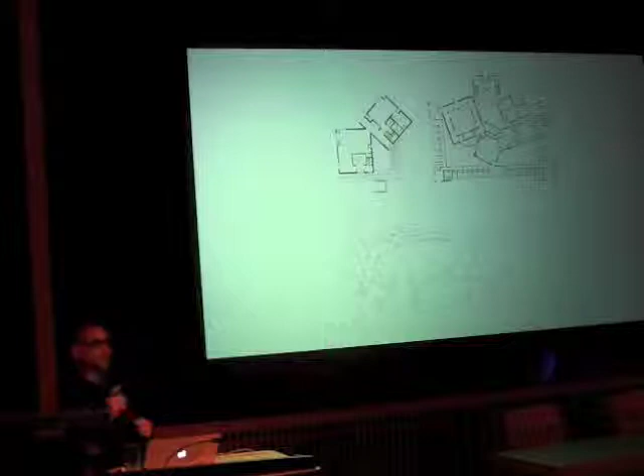This is very different than the techniques adopted by Hugo Häring and Hans Scharoun, where vestiges of those types remain intact, but then are brought together, fused together by a technique that, if you like, is much more organic and much more binding.

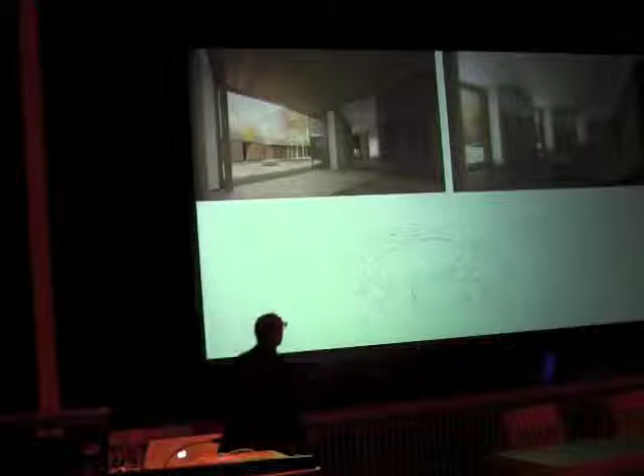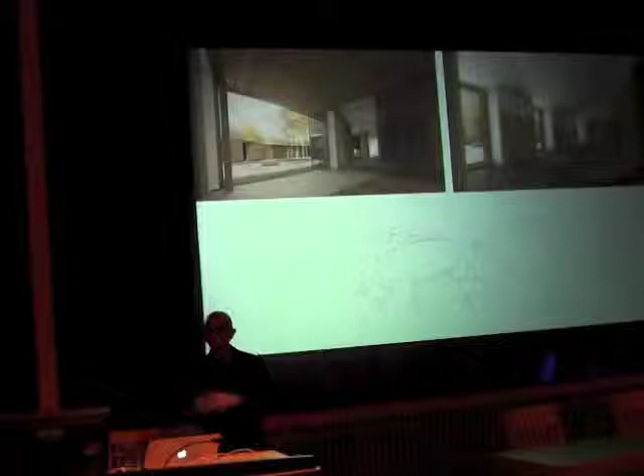And this project is trying to maintain the self-consciousness of the former, but radicalize the latter in a series of spaces that are not just at the periphery, because those are the kind of literal pleasures of the view, but some of the more sophisticated spaces really happen along the promenade in this core, where both the courtyard and the rooms and the kind of tectonics that brings us all together is brought into evidence.

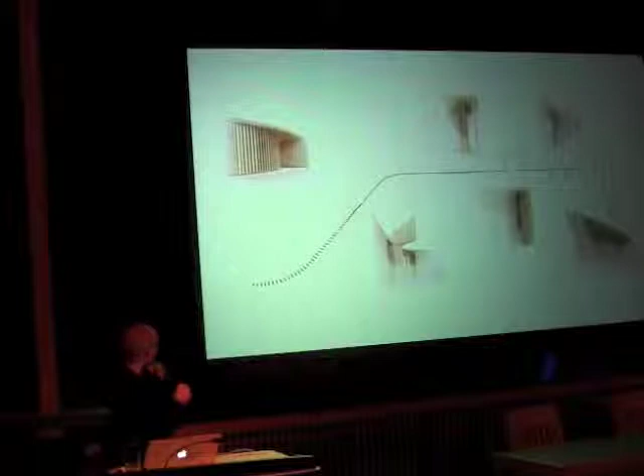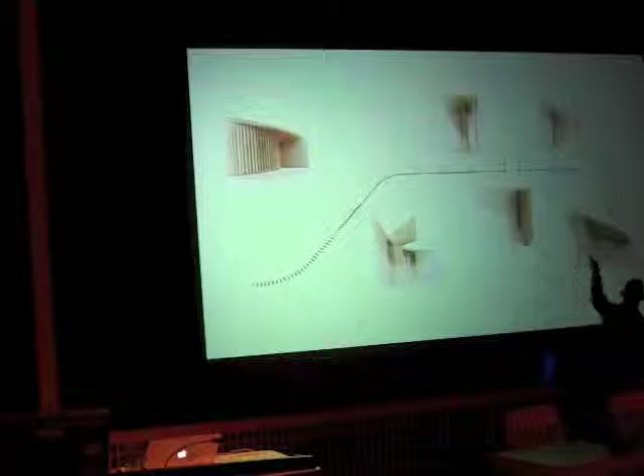The tectonic system then is quite simple, but important to argue for, a kind of rumination of the relationship between the part and the whole of the building. The cladding system is not merely a veneer, it's a system that has depth to it in the context of the louvers. It has depth to it in the context of the doors and a board and batten system that gives depth to concealed doors. It has the possibility of programming itself by producing storage depths. And in the context of the fins that give autonomy and privacy to each of the decks, is scalable.

And not only is it a slat of wood, but that slat of wood develops into dimensions that begin to impact morphologically and structurally the building, because in fact the drainage system and the structural system are embedded in these wedges, which are a kind of objectification of those cones of view as they go out. Naturally, this is also a reflection on the difference between the vertical and the horizontal, knowing that the winter will bring a completely different extension as the floor and roof laminate get extended one more time into the depths of the snow.

Now, as I've already exceeded my time, I apologize. I wanted to end with really just 3 slides that bring the question of typology on the one hand and structural systems on the other, and try to argue for a way of working that brings 2 historical trajectories together. 2 trajectories that rarely are brought together by either historians on the one hand, nor architects who take positions in one extreme or the other.